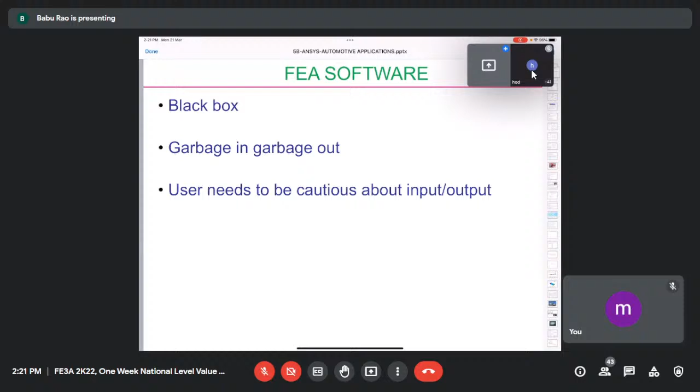Out of all these softwares, though many softwares claim that they have a non-linear solver, in my experience, what I have seen is olden days ADINA and presently ABAQUS. At present, ABAQUS is the software which has a true non-linear solver.

And just for your understanding, I have shown this; many of my predecessors or speakers who are coming in the later stage must be showing these basic analysis stages. You all must be knowing. I need not spend more time here. Pre-processing followed by solution and finally post-processing.

What I would like to say here is you have to be extremely cautious during the pre-processing phase. If you don't establish the modeling practice properly, you will be running into so many errors. So the accuracy of your analysis will be questionable. And depending upon the software, the time required for analysis will also be judged. Similarly, when it comes to solution, different softwares incorporate different algorithms. Like you all know, ANSYS basically uses the Lanczos algorithm.

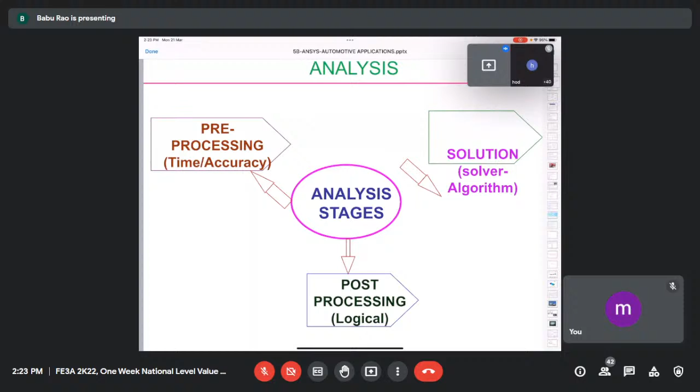So whatever results it is giving out, let it be stress results or displacement results or frequency results or something else, you have to have your own judgment, your own assessment, and you have to carefully examine the results and decide whether the results furnished by the software appear to be logical or not, before you present these results to somebody else.

Particularly when it comes to pre-processing, geometric modeling, meshing, loads, boundary conditions, all will be part of pre-processing. Out of all, most of the time is taken during geometry modeling. Many people make use of 3D elements and 3D geometry straight away. But in my opinion and experience, to the extent possible, you should not go for 3D elements, because meshing with 3D elements is the easiest task. But compared to 2D elements and 1D elements, the 3D element accuracy, because basically, when you are doing FEM analysis, you have to be particular about quantitative and qualitative assessment.

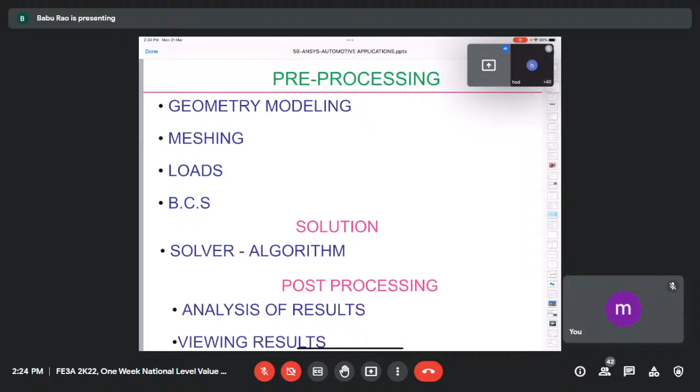Quantitatively, a 3D element may definitely be a suitable thing, but when it comes to qualitative, that is when you are talking about accuracy of the results, what you are predicting, you have to be very careful. And boundary conditions also play a vital role. Boundary conditions are not that easy. And as I told you earlier, you have to be careful about the post-processing part also.

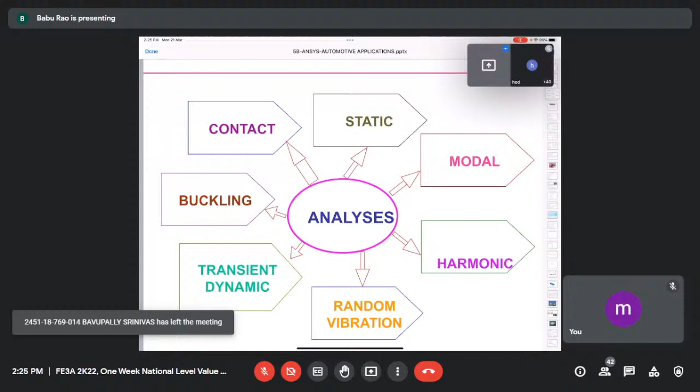Just for the sake of your understanding, many of you must be knowing, ANSYS is basically abbreviated like this: Advanced Numerical System Simulation Software. It's a commercial software package which will enable you to handle various versatile varieties of mechanical problems. So, what are the different analyses that can be done using ANSYS? Starting from static, modal, harmonic, random vibration, transient dynamic, buckling, and contact. And similarly, some advanced level analysis you can also do, like acoustic and design optimization, CFX,

and then fatigue also. Of course, when it comes to the thermal front, you can do steady state thermal analysis, transient thermal, and then thermostructural also. Only one thing you have to note down when you are talking about thermostructural is, you can't give both thermal and structural loads simultaneously at a time.

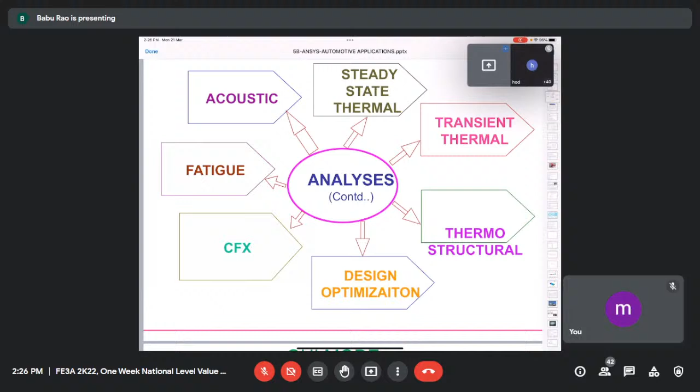First you have to do thermal analysis, and for a given heat load, you will be estimating the temperature distribution. So taking that temperature distribution, which is the outcome of thermal analysis, and then giving certain constraints or boundary conditions, you have to go ahead with the structural analysis, taking the temperature distribution obtained from thermal analysis as the load along with the structural load. Structural analysis will be done.

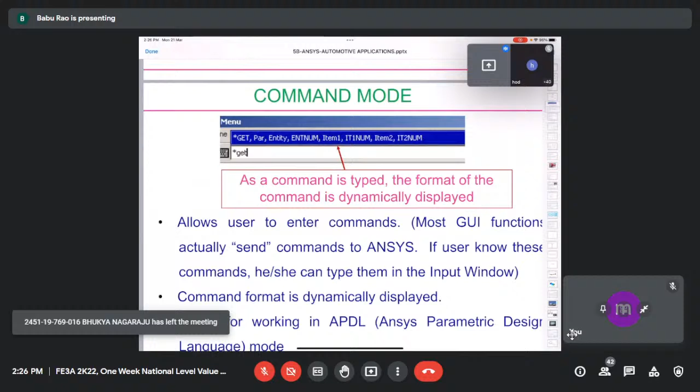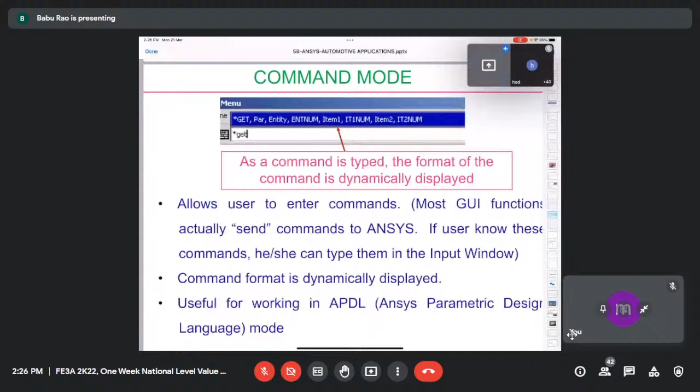If you see the last line of this slide, that is APDL mode, that is ANSYS Parametric Design Language mode. This has got a fantastic feature embedded in it. Many of you may not be knowing. Suppose you are working in an organization where you have to do analysis for the nozzle. Let us say that organization is developing nozzles of different sizes, different dimensions, different materials. Then

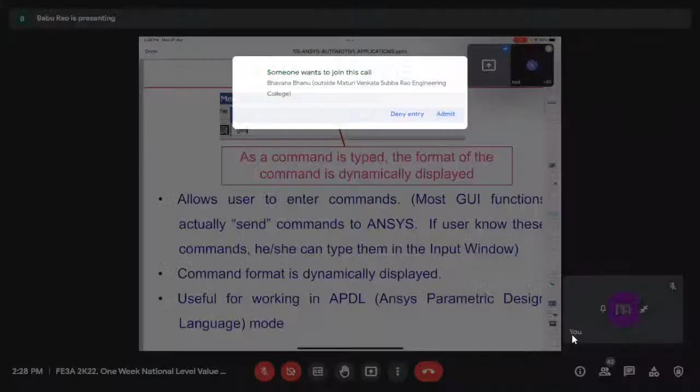every time you are doing analysis, it is not necessary that you have to start from scratch. You need not every time start doing geometric modeling, then meshing, then boundary conditions. All that is not required. Once you do analysis one time, and if you feel that your requirement is repetitive in nature, the moment you complete the analysis for the first time, you will come back with a file with .log as extension. That file you can take, and next time whenever you have to do the analysis for the nozzle with different dimensions, or maybe a different material, you don't have to start again from scratch.

You simply take the log file, you edit it as per your new dimensions or new material properties. Then you just run that log file. You just import that log file into your ANSYS window. You open the ANSYS window. Don't try to do it from scratch. Just get that edited log file loaded into this. Then within no time, analysis will be done for the new configuration. That is one advantage of this APDL mode.

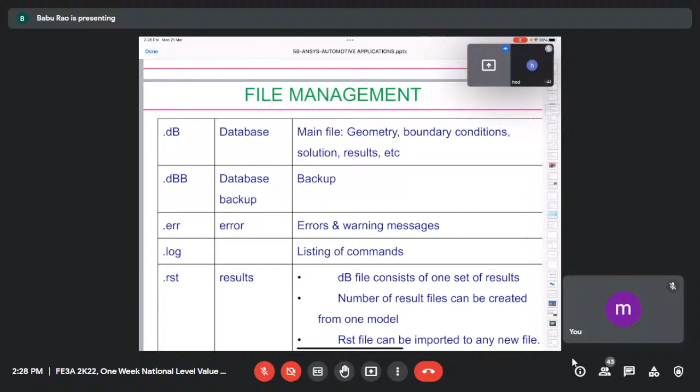And there are some standard file formats also. This DB file, DBB, all that I think you must be knowing. And basically, you must be wondering, the title of the program starts with innovative. But why is this fellow, being a scientist, showing all old or very conventional things?

What I heard from my friends or students who did so many projects with me, where they worked in ANSYS, and when they go for outside interviews, the questions asked to them, what I could make out is, suppose whenever you are planning to join some software company like Infosys or Tech Mahindra, where they induct people based on a mechanical analysis background.

They expect that you are expert in that software. Before you claim that you have done ample analysis in ANSYS, you should be thorough with the fundamentals.

What I normally find is people claim that they have done so many analyses in ANSYS, but many of them are not thorough in fundamentals. They get flustered when asked to explain fundamental things like the difference between a geometric model and a mesh model.

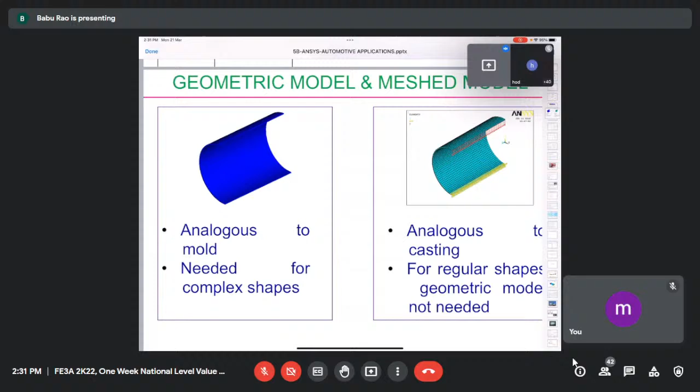It is not necessary that software puts a condition that you have to do a geometric model before converting to a mesh model. Software doesn't care for it; it only looks for the mesh model. We are the ones who make the geometric model so that we get the actual shape of the object for which we have to do the analysis properly. We do the geometric model, then discretize or do the meshing. Otherwise, software needs only information about the meshed model.

Because you should not miss certain fundamentals, another surprising aspect of ANSYS is that it doesn't consider units for material properties. It will not ask you to code the unit; it only asks in terms of numbers. When you are feeding Young's modulus, it doesn't ask you to specify the unit also. Whatever number you give, it takes it.

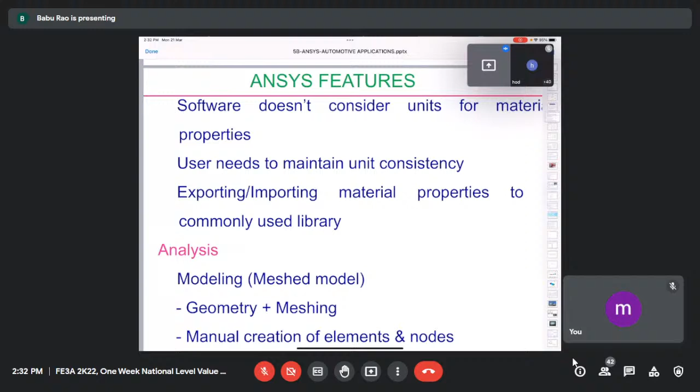So ANSYS expects that the user will maintain consistency. When you start with geometric modeling and give numbers in certain units, when you go for material property in ANSYS you don't have the option to change back to another type of unit. From the beginning, you have to decide whether you will continue with millimeter units or meter units, and maintain that consistency accordingly.

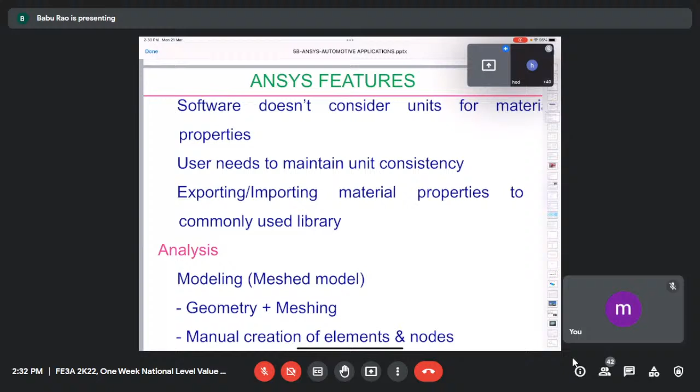However, exporting and importing features are admissible in ANSYS. Whenever you are working with common metallic materials, particularly steel and aluminum, you need not define the material properties every time. You can import and export, and it will be stored in the material property library. Whenever you do a new analysis, you can simply import it.

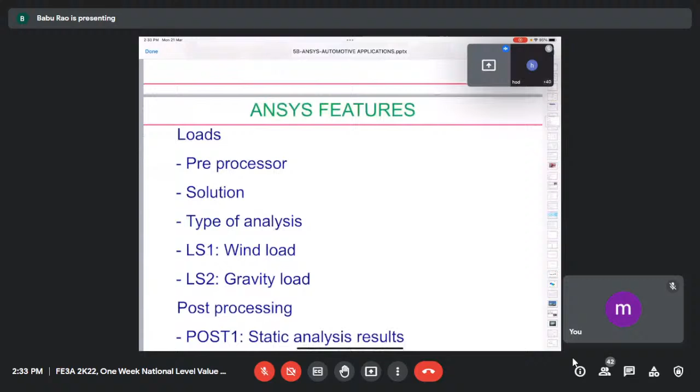When it comes to analysis, it calls for modeling, that is geometric modeling and meshed model. Sometimes when the geometry is not so complex, you can also manually create the elements and nodes. And when it comes to loads, either you can define loads in the preprocessor or through the solution also.

When you talk about type of analysis, certain nomenclature will be there in ANSYS, like LS1, LS2. LS is load step. LS1, when you choose this option, you can give a wind load type of thing. LS2 is load step 2, where you will be giving the gravity load.

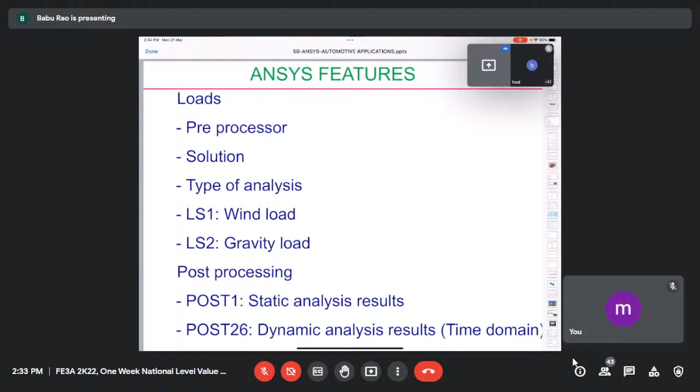When it comes to post processing, you can see time independent results, that is static analysis results, in Post 1. Post 1 is a standard nomenclature followed by ANSYS. Post 26 is time dependent analysis visualization, so whenever you have to watch results in terms of dynamic behavior, you go into Post 26.

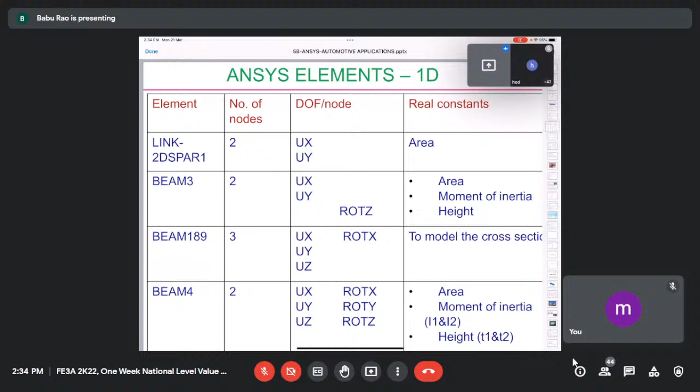I have brought typical elements available in ANSYS. Some of the elements you are seeing here may not be visible in today's version, but I want to give you a feeling of what sort of elements are available in ANSYS, and what degrees of freedom and real constants those elements will be having. Today, Shell 63 element is totally removed from ANSYS, and for 3D elements, I think Solid 45 is not there now.

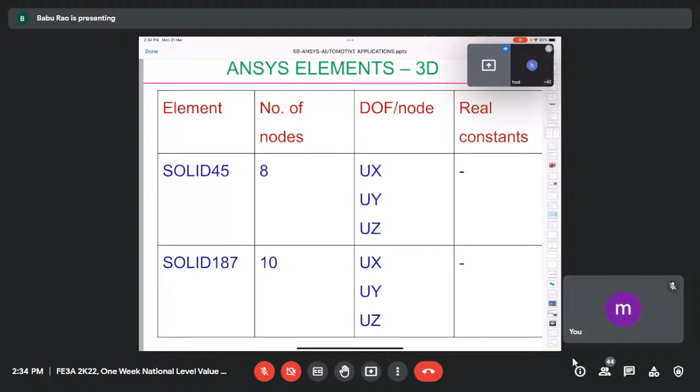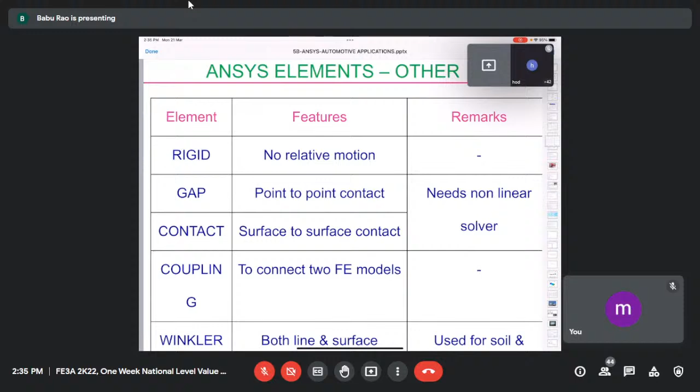Similarly, some special elements also will be there. When you have to handle pipe type of objects, straight away the pipe element is there, and this element is very popular. Combin is a combination element, where you can model both stiffness and damping. This element will be useful when you are dealing with dynamic analysis. And very special elements are also there in ANSYS, such as rigid element, gap element, contact element, coupling element, and Winkler element. Winkler element is normally used for civil applications, where you are required to model the soil and such.

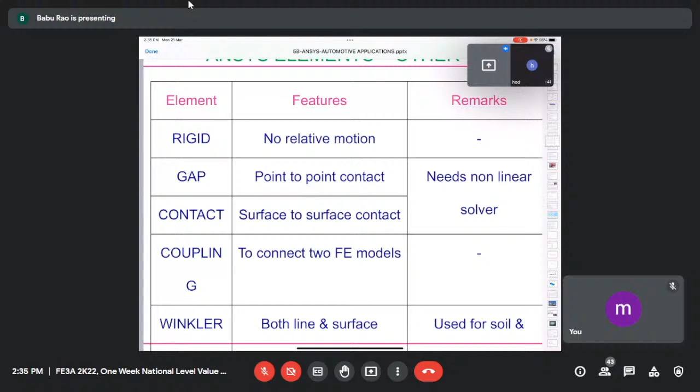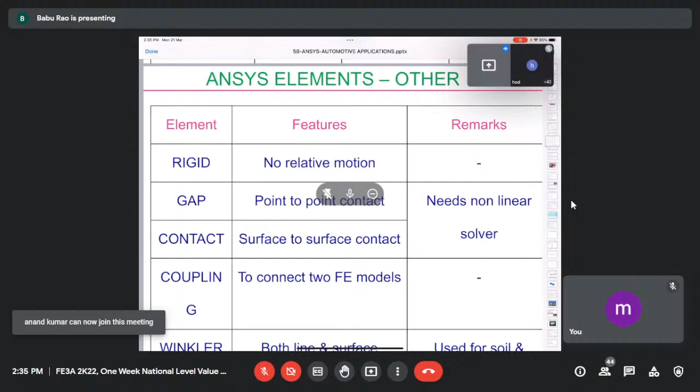Now let's look at the gap and contact element. When you have to do contact analysis, one point we should note is that conventional elements like beam, shell, solid and so on require a linear solver. But when it comes to gap or contact elements, you can model the contact dynamics, but you will be depending upon a nonlinear solver. You also have to bother about the efficiency of the nonlinear solver, that is, the algorithm that has been adopted by ANSYS.

This slide is very important, particularly for students who are expected to appear in interviews. When it comes to material properties, for static analysis, only two material constants are required: Young's modulus and Poisson's ratio. Density will not really be required. But when you go to dynamic analysis, be it modal analysis, random vibration, or transient dynamic analysis, apart from Young's modulus and Poisson's ratio, you are also required to give the density.

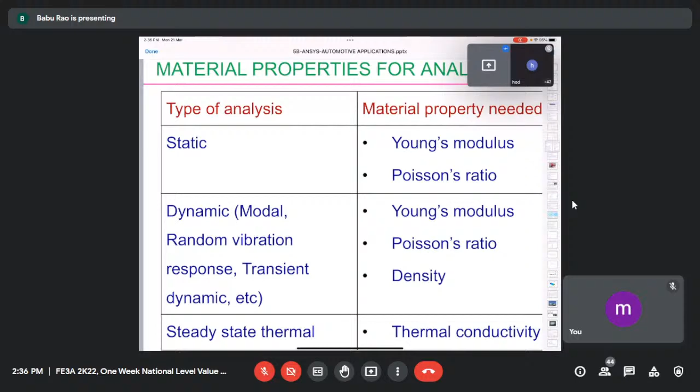When it comes to thermal analysis, for simple steady state thermal analysis, the only property you need to define is thermal conductivity, K. But for transient thermal, that is time-dependent thermal behavior, apart from K you also have to give density and specific heat, CP and rho. So K, rho, CP. When it comes to thermo-structural analysis, apart from K, you also have to give alpha, the coefficient of thermal expansion, along with Young's modulus and Poisson's ratio.

Now I am slowly touching the very foundation part of ANSYS. Many people get misinterpreted about where to start. I have seen students complaining that in colleges, people don't teach ANSYS properly, that they simply deal with non-practical structures like beams and so on. They say our ANSYS lab has taught us only beams, and didn't teach us how to model the automobile engine and such.

But still, I feel one need not blame this, because when you are starting to work on something new, you should also gain confidence. As I told you, the point you should not erase from your mind is that FEM, the finite element method, is an approximate method. So what you are doing is like a guess. There is no guarantee for the accuracy of the result you are predicting.

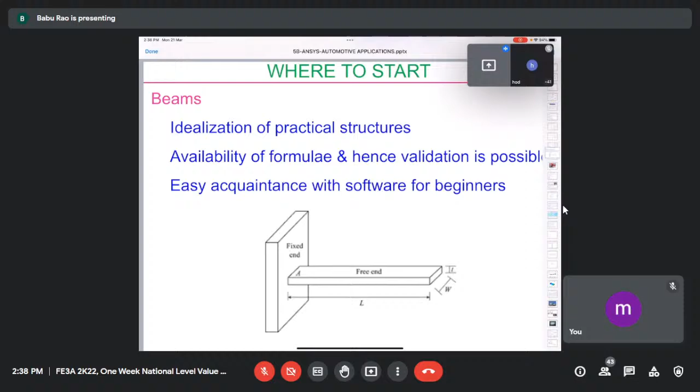Particularly when you are in the beginning stage, if you start working with beams, there are theoretical solutions available. So whatever you do in ANSYS, when you work back from theory and compare the results of ANSYS with theory, you will gain confidence, knowing you are traveling in the right direction. In the beginning, if you aim for analysis of an automobile engine or gearbox, you will be left nowhere, not knowing whether the result you predict is correct or not.

And there are some special features in ANSYS when it comes to analysis. Particularly when it comes to static analysis, sometimes you may have to deal with rotating objects also. I think you all must be knowing, when you are talking about static analysis, only one matrix will be there, that is the stiffness matrix K, and two vectors will be there.

One is the load vector, that is F, and another one is the displacement vector Q. So the general relation used for static analysis is K into Q equal to F.

Whatever load you give, say when you have to do static analysis for a rotating object, let's take the example of a ceiling fan blade. The primary load that comes on the ceiling fan blade is its angular velocity. So when you define angular velocity as a load, the software takes whatever omega you give and calculates mr omega square, converting it into centrifugal force. That much value gets dumped into your force vector.

So when you do the static analysis for the ceiling fan blade, you will see the stress contours on the blade, but the blade will not be visible as if it is physically rotating.

But to the best of my knowledge, that feature is there only in ABAQUS. In ABAQUS, when you see the stress contours, what I mean is, when the object is rotating, at 0 degree what will be the stress value, at 90 degree what will happen, at 180 degree what will happen - all that you have to do manually in other software. But in ABAQUS, you can even see the stress contours when the blade is physically rotating in that view. That feature is there in ABAQUS, but not in conventional FEM software like ANSYS and so on.

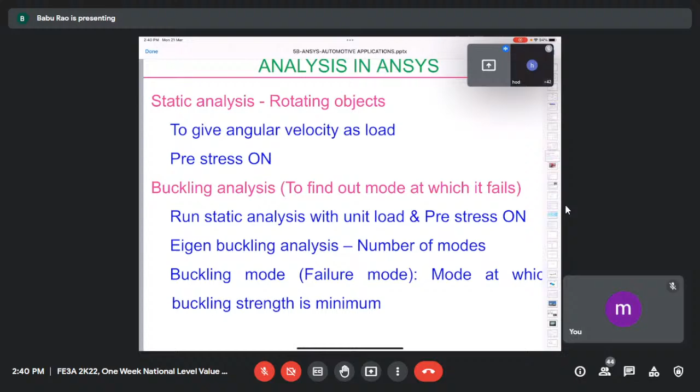And you can also do buckling analysis. Buckling analysis is some sort of dynamic analysis only, though we call it static. It is called eigenvalue buckling analysis. So you will be able to understand the failure mode.

And for thermal analysis, one important point to keep in mind, which may be useful for you in interviews, is that when you are talking about the edges of the object for which you are doing thermal analysis, ANSYS will treat all edges as adiabatic until unless you specify otherwise. So keep this point in mind.

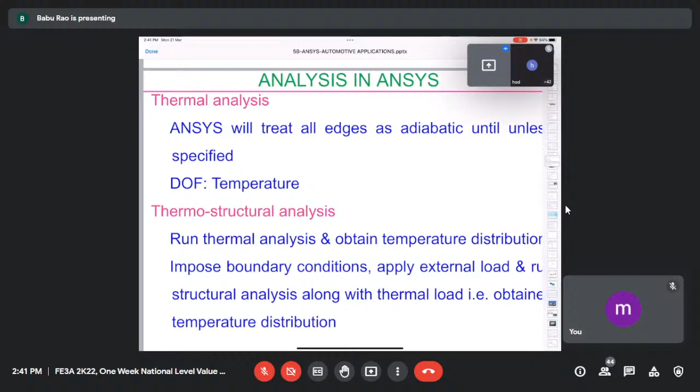And when it comes to thermostructural analysis, first you have to do thermal analysis, obtain the temperature distribution, then consider the boundary conditions or constraints, apply the external structural load, then do the structural analysis along with the thermal load. That is how you do thermostructural analysis.

So after giving the fundamentals of ANSYS, I will now make you run through one case study, because as I told you in the beginning, I have to limit myself to the automotive perspective. So I have actually guided one MTech student in doing the analysis of a particular chassis.

You all must be knowing, I need not teach you, all of you are automobile engineers. In any automobile vehicle, when it comes to structural perspective, when we are talking about load-bearing members, chassis is the main load-bearing member, which takes care of almost all the loads of all subsystems.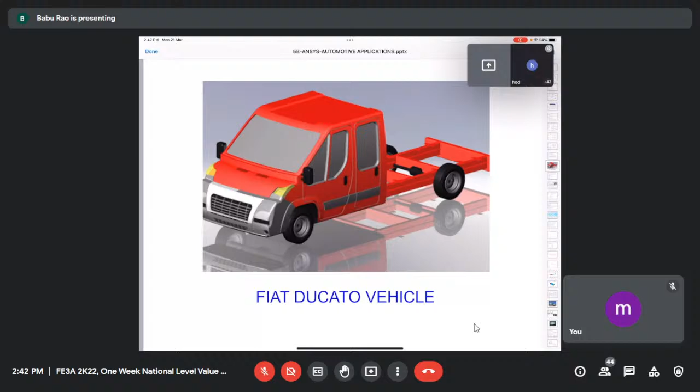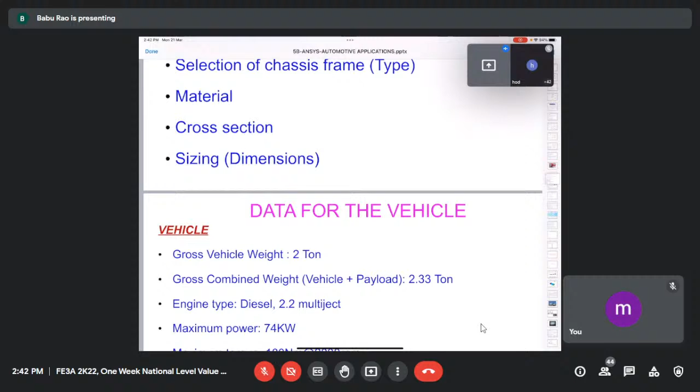So we have taken this vehicle, and initially we started with static design. This is the design philosophy we adopted. The design goal is the strength to weight ratio should be as high as possible, and these are all the things we have to basically estimate: selection of the chassis frame, then we have to choose the material, choose the cross section, and work out the dimensions. These are the inputs we have taken for this vehicle to do the analysis.

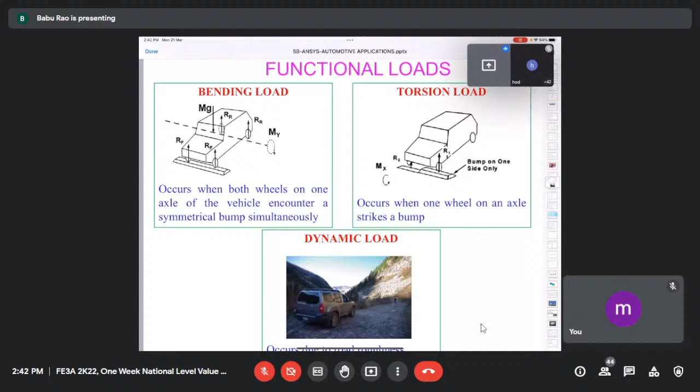Then these are the various functional loads that come onto any automobile chassis - bending load, torsion load, and dynamic load. Dealing with bending load is relatively easy compared to torsional load. Estimation of bending stiffness is very easy compared to torsional load, because many people think chassis is like a beam type member, so if we can estimate the bending load, nothing like that - but we also have to estimate the torsional stiffness. That is also an important part when dealing with this chassis.

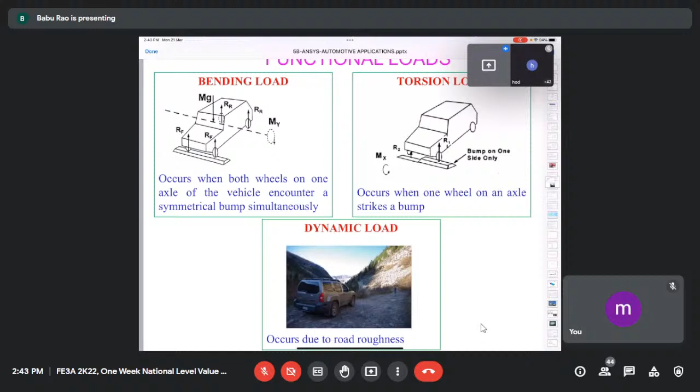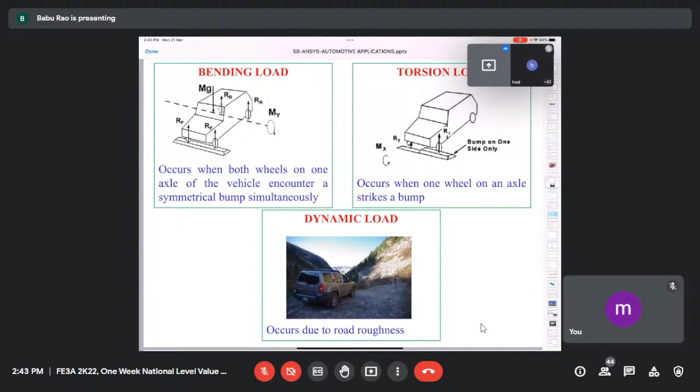Now, in most of the cases we limit ourselves by doing static analysis, but it will not be sufficient. See, when you are talking about an automotive vehicle, you also have to ascertain its design adequacy in a dynamic environment, that is particularly vibration. So in this particular case study, what I am showing is more interesting.

See, you would definitely have seen many reports, many papers which have dealt with static analysis of the chassis. But apart from that, through this case study, you will also understand the importance of random vibration response analysis. So basically, I think this nomenclature you all must be knowing.

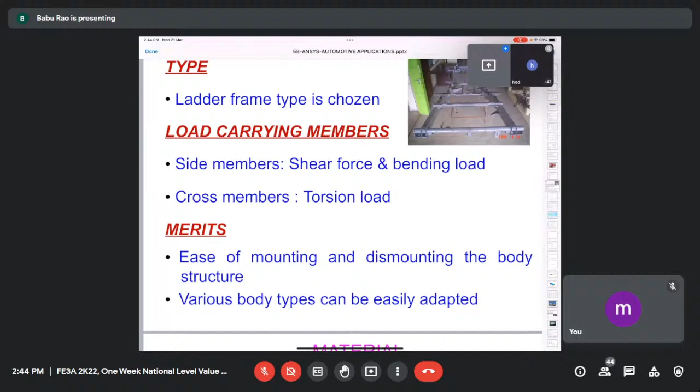We have chosen a ladder frame type, and when it comes to load carrying members, basically the side members are expected to carry the shear force and bending load, but the cross members carry the torsion load also. So having selected the ladder frame, there are certain associated advantages. One is mounting and dismounting of the body will be easy, and various body types also

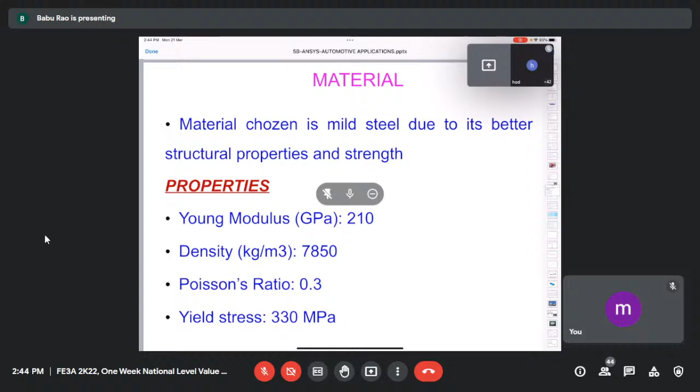can be accommodated. When it comes to the material, we have chosen a common structural metallic material due to its very good structural properties and strength. These are the metal properties, I need not tell you. Now comes an interesting part.

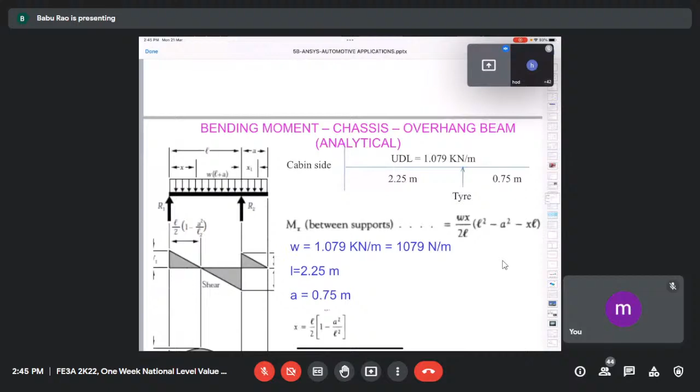When it comes to cross section, you all know very well that there are different standard cross sections available. But in my opinion, compared to any other cross section, I cross section is the best one. For some reason, if I cross section is not possible, then you should go for box cross section. Box cross section means a combination of two C cross sections. Worst case is C cross section. So these three are the best cross sections available based on the hierarchy.

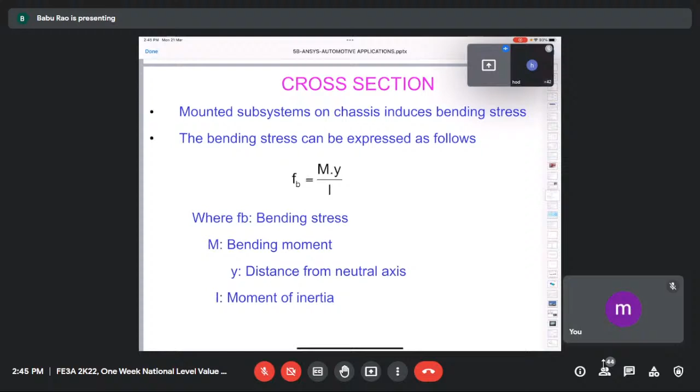So to work out the cross section, we have taken the standard bending equation. Of course, this is readily available. It is not something that we have derived. We have taken the expression for bending stress, which basically wants us to estimate the bending moment. So we have assumed that the chassis is something like an overhanging beam, and then we have taken the associated formulation from theory, and we have estimated the bending moment.

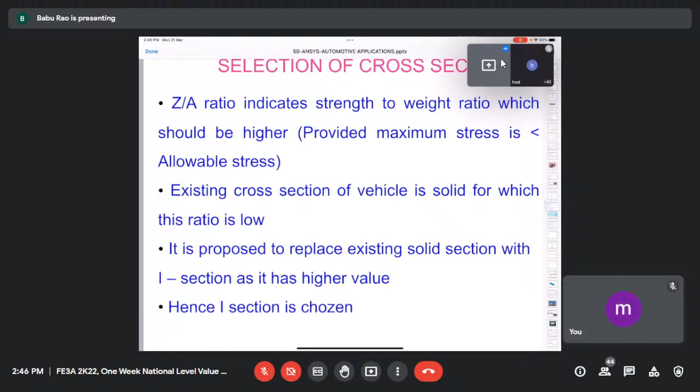And the existing cross section of the vehicle which we have considered is solid, for which this ratio is very less. So as I told you, it is basically proposed to replace the existing solid section with I section, as it has got a very high value. That is how we have chosen the I cross section. I also want to bring it to you.

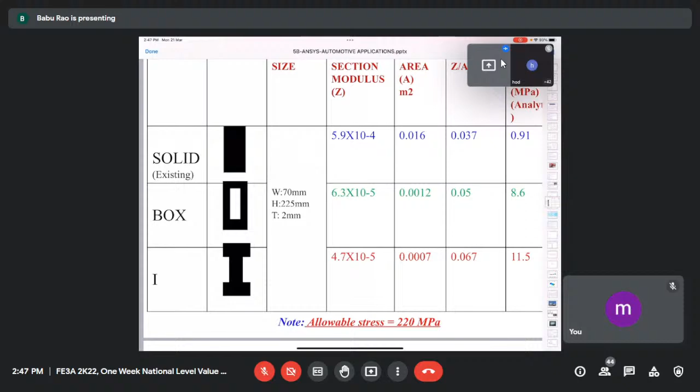As I told you, any automobile vehicle, when it is moving on the road, has to face vibration invariably, and the nature of the vibration will be random vibration. That is why, you all know very well, we have shock absorbers. When you go on a two-wheeler, or when you are sitting in a four-wheeler, when the vehicle is moving on the road, you experience some vibrations. Where are these vibrations coming from? They are basically coming from the road roughness and the speed of the vehicle also.

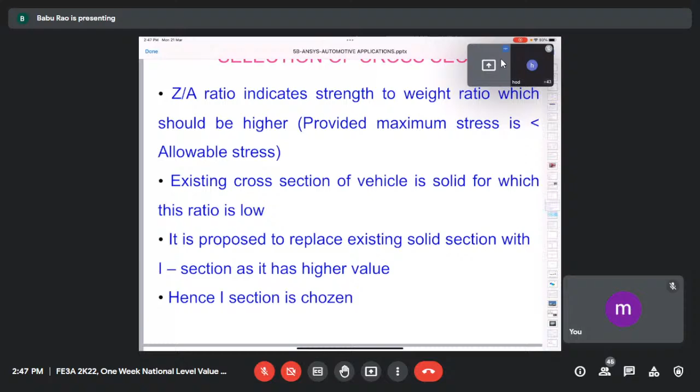So out of all cross sections, I cross section is the best section. Not only for the strength to weight ratio, it will have the highest vibration resistance in terms of damping. That is why I cross section is the best cross section. So once the cross section is finalized, length and breadth are maintained as the existing, that is standard data available in the literature.

Only the cross section has been changed from the existing rectangular cross section to I cross section, and then we have worked out the base model. And whatever additional members are required, maybe for enhancing the torsion stiffness, we tried to add based on the iterative study which we have carried out with the help of the FE model.

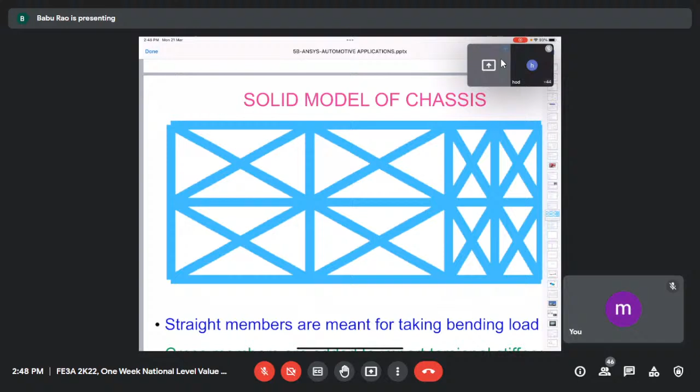Otherwise, the solid model of the chassis, when you see it from the top view, looks like this. The straight members, as I told you, are basically meant for taking bending loads, whereas cross members are added basically to increase the torsion stiffness. This is how the solid model of the chassis looks.

Then we have gone ahead to the dynamic design. As I told you, any vehicle in general experiences very high random vibration. And this random vibration, when the vehicle is moving on the road, gets transmitted from the road through the tires to the axle and then to the main chassis part. And in between, the suspension system will be there.

You know very well we have shock absorbers and all. In case of a two-wheeler, we call it a shock absorber. When it comes to a four-wheeler, we call it a suspension system. This suspension system is expected to reduce the vibration coming from the road. So sometimes the suspension also will not be sufficient. Then we may have to change the suspension system so as to keep the vibration in limits. But suspension system replacement is not always possible.

I'm just giving an example, not to criticize anybody. We have this passenger type of RTC bus. When you travel in the passenger type of RTC bus, and when you travel in something like a Volvo type of vehicle, you normally find a difference in comfort because of the suspension system. Volvo will have an advanced suspension system, that is a pneumatic type of suspension system.

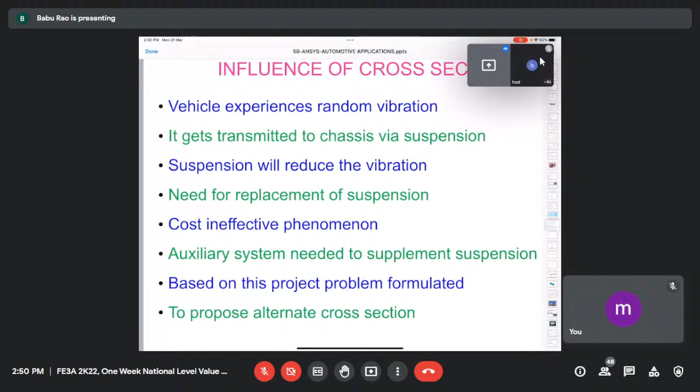So though the primary objective of having a suspension system is to reduce the vibration, you can't fully depend upon the suspension system. So apart from dependence on the suspension system, you can also plan the proper cross section for the chassis in such a way that it also adds a good amount of vibration resistance or vibration reduction.

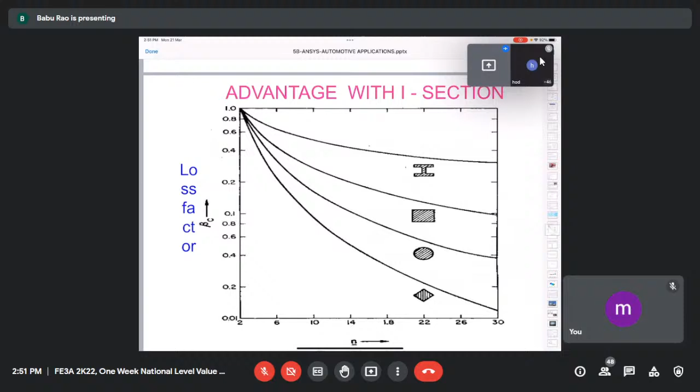As I told you earlier, this plot shown here has been captured from one book, Principles of Vibration Control, written by Mr. Mallik, a professor from IIT Kanpur. He has done a study. He says out of all cross sections, standard, diamond, circular, or rectangular, the I cross section will have the highest loss factor. Loss factor is nothing but damping. Damping is nothing but resistance to vibration.

So now the point is, when we are talking about dynamic analysis, I feel very few of you must have dealt with dynamic analysis in ANSYS. The software will give you the methodology for how to do the dynamic analysis. Dynamic analysis basically means 3 different types of analysis: one is modal analysis, another one is random vibration response analysis, and the third one is transient dynamic analysis. I will explain when random vibration is required and when transient dynamic is required.

When the vehicle is going on a normal road, whether a smooth road or a normal rough road, what you experience is sustained vibration. As long as the vehicle is going on the road, it will experience vibration. That is sustained vibration, called random vibration. But when the vehicle has to pass over speed breakers or potholes, the special dynamic environment experienced by the vehicle is called shock. Instead of calling it shock analysis, in software nomenclature you call it transient dynamic analysis.

So when you have to assess the design adequacy of the structure, depending upon the requirement, sometimes you do random vibration analysis, sometimes you do shock analysis also. But whether you have to do random vibration analysis or transient dynamic analysis, carrying out modal analysis is a prerequisite. Unless you do the modal analysis, you will not be able to do the random vibration response analysis.

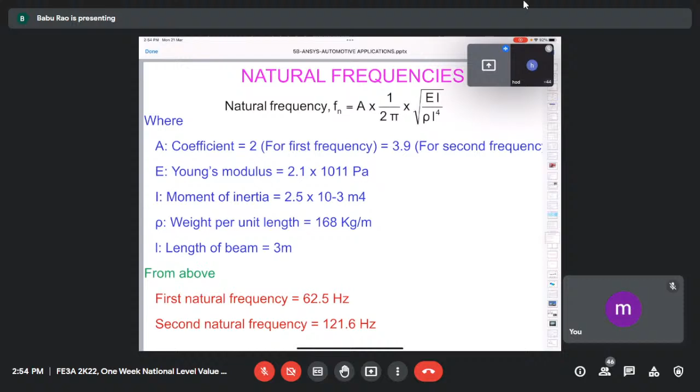To start with, this is how we have taken the formula for natural frequency. For various standard beam configurations, we have the closed form solution for natural frequency. In this, certain coefficients are required, which we have taken from the literature, and it also calls for some material properties like Young's modulus, density, some dimensions like length, and it also needs moment of inertia. When we keyed in all the input parameters in this relation, we could estimate that the first natural frequency is 62.5 Hz and the second natural frequency is 121.6 Hz.

Now when it comes to damping, once you complete the modal analysis and estimate the frequencies, you also need the damping value. So from the book I was mentioning earlier, Principles of Vibration Control, for the chosen cross section, we have captured the formula for estimating the loss factor. Using different parameters like the damping index of the beam material, that is steel, and the ratio between thickness to half of the height, we have calculated the loss factor. The damping factor is half of the loss factor. That is how we have estimated the damping factor.

Then this is the most challenging part. We have to do the random vibration response analysis without using the software. As we have seen, the chassis has only two frequencies within the frequency range of interest, that is up to 150 Hz. This is also an interesting thing which you are supposed to know: what is the frequency range of interest? I just want to give a brief about the vibration aspect also. Of course, you would have studied it during your curriculum.

When it comes to vibration, shock is different. The two standard forms of vibration are, one, sine. When we study vibration, we call it harmonic motion, harmonic analysis. That is basically sine. The second one is random vibration. The difference is that sine will be regular in nature. It is harmonic, it has some discipline. But random vibration is not regular. It has an irregular, erratic type of behavior.

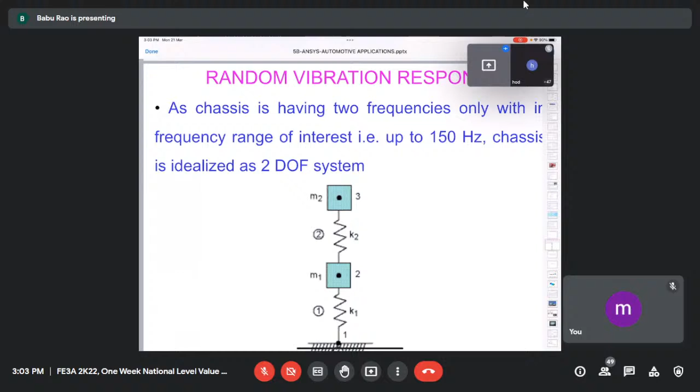See, when it comes to a 1 degree of freedom system, when there is only one frequency within the frequency range of excitation, doing random vibration response analysis using the theoretical method is as easy as drinking water. But beyond a 1 degree of freedom system, beyond one frequency, when you have two frequencies or more, then treating it theoretically is very, very tough.

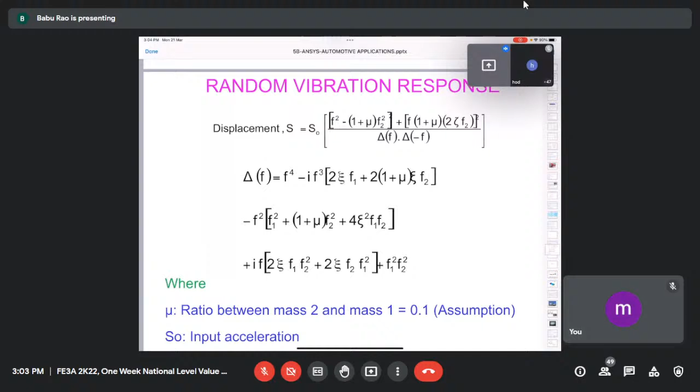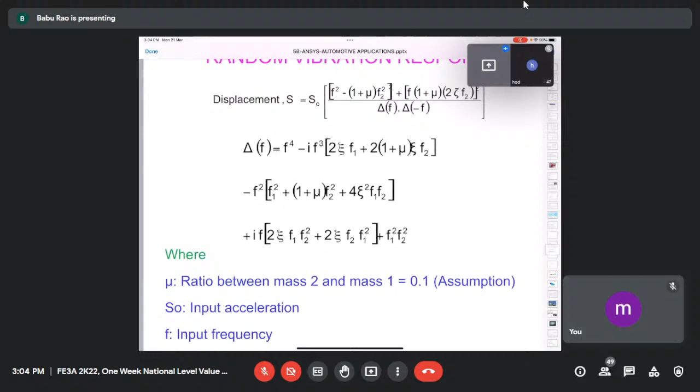So this is how the formulas are. We could get them from some standard and very rarely available literature, and we had to do some mathematical derivation also. This is how we got the expression for response in terms of displacement. And then, whatever formulation we could establish for estimating the random vibration response, for the sake of best utility, we have developed a software using MATLAB.

You all must be knowing MATLAB. MATLAB is a programming language. We can write programs, but MATLAB has got so many features. MATLAB has got GUI-based features, graphical user interface. The best example is the digital calculator in your computer. When you want to use it, only certain buttons will be visible to you. Numbers, multiplication, addition, sine, cos, all the symbols will be there. You just click a specific button and your result will be produced.

But whether you know it or not, for you to get a certain mathematical operation done, the back-end program is written in Visual Basic. The computer in which the digital calculator is there need not have Visual Basic software loaded. Without it, the digital calculator still works. Because once we develop a particular software, if we convert it into an exe type of file, then you can use that file in any PC where that particular software is not there.

What I mean to say, the program we have developed in MATLAB, once we convert it into an exe file, can be loaded in any computer where you don't have MATLAB software. And the additional advantage with the GUI-based feature is you don't have to get into the mathematical formulation. You don't have to get into complexity at all. The GUI will provide certain buttons where you can simply enter the inputs.

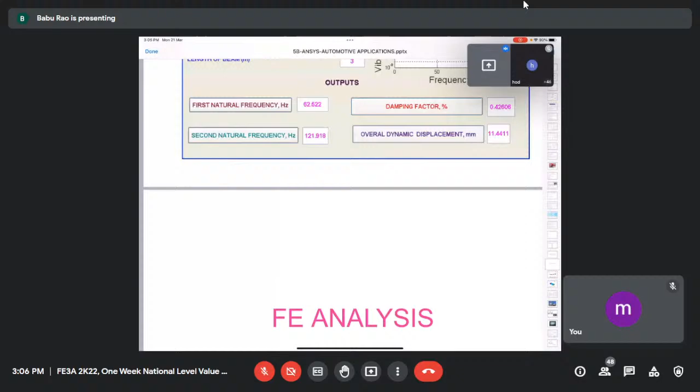Then, to validate whatever results we estimated using the theoretical method, we did the same analysis using ANSYS software.

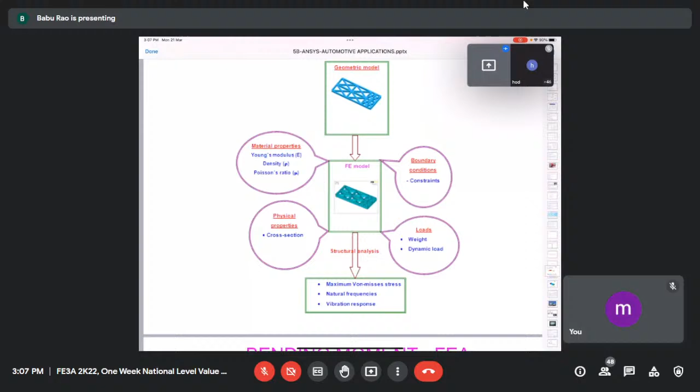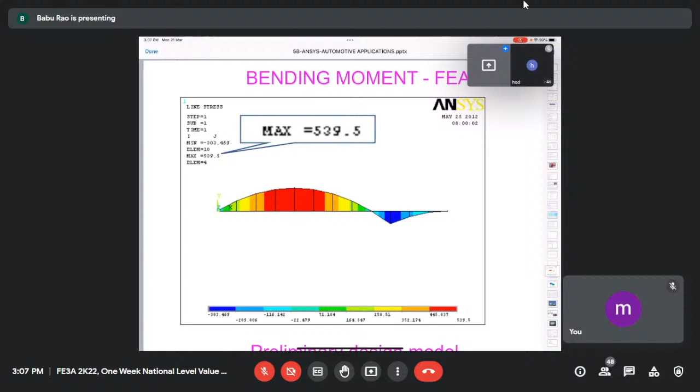As part of static analysis, we estimated the stress; as part of modal analysis, we estimated natural frequencies; and as part of dynamic analysis, we estimated the vibration response. This is how we did the static analysis. We estimated the bending moment and the bending stress. And this is the FE model with the beam element.

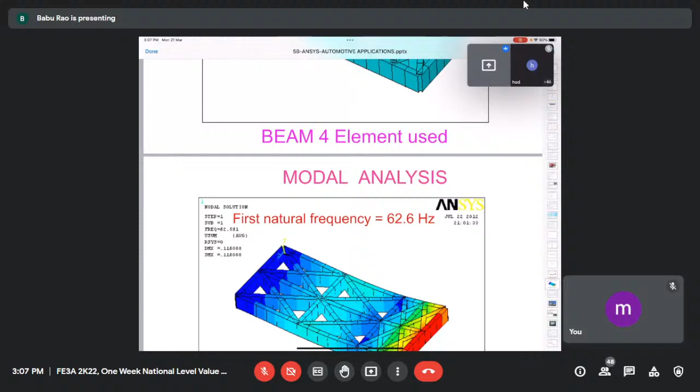The first natural frequency has been estimated by carrying out modal analysis in ANSYS. The second natural frequency is also obtained; that is the second mode shape. And finally we did the random vibration response analysis.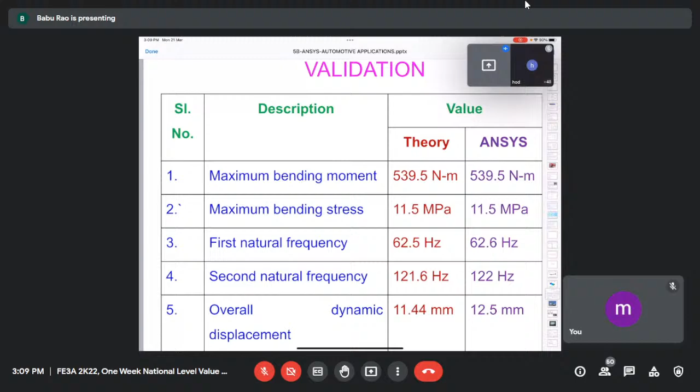What I mean to say, for you to gain confidence about the subject or about the theme which you have taken, in fact, we have struggled a lot. Initially, we thought we would do it with ease, but establishing the formulation for doing random vibration response analysis without depending upon the software was not an easy task at all. We struggled a lot. And finally, the formulation we established for carrying out random vibration response analysis appeared to be correct when we tried to validate with ANSYS.

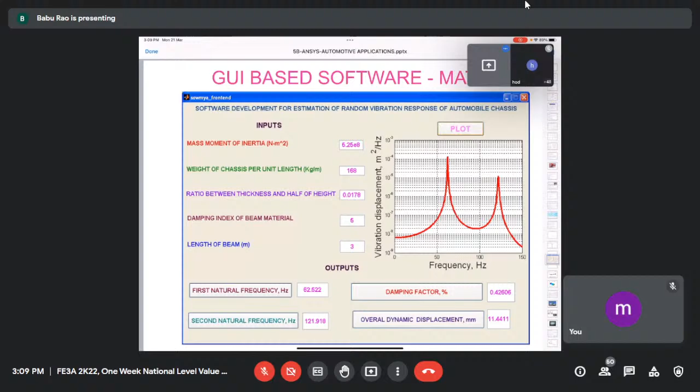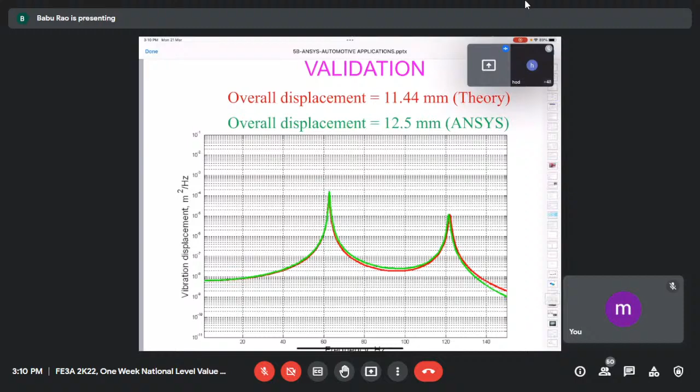See, what I want to say with the utmost confidence, whatever the features that are available in commercial software like ANSYS, we could establish using a typical programming language like MATLAB. All these outputs, whether it is natural frequency or damping factor or dynamic displacement or bending moment, bending stress, we have developed a parallel platform using which analysis can also be done. So that was our expected outcome. And you can also see, not only in terms of numbers, the displacement pattern, how it is matching between theoretical calculation and ANSYS.

Though the topic given to me is to speak about ANSYS and analysis from an automotive perspective, I think I am exceeding the limits stated to me, for the benefit of faculty members or students. As I told you in the beginning, doing analysis is not a great job. I want to tell you with utmost confidence, with utmost guts, doing analysis is as simple as that. There are so many people in the lanes of Hyderabad who can teach you how to do the analysis. It's not a big job at all.

But as an automobile engineer, my strong recommendation is you should work on experimental things also. You should know how to measure the vibration for an automobile vehicle. We have been working for the last 22 years on how to measure vibration. Why I say this is, in today's scenario, what is the expectation of an automobile engineer coming out of the engineering college? He should get a good job. Except a few people who want to go abroad for an MS, many of you must have a desire to get a core job, that is the automotive sector. So just knowing how to do analysis will not be sufficient.

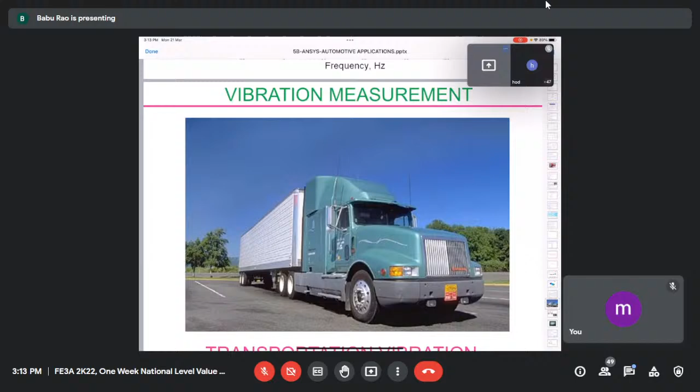Strain measurement to some extent, you don't have to put your brain to a great direction, but vibration measurement will be most crucial. So this I want to show you. As I told you, the need for the measurement I have already explained. The first and foremost point is the structural integrity.

When the vehicle is transported from Hyderabad to Karimnagar, it should not happen that bolts and nuts get loosened. The way the vehicle has integrity before transportation, before movement is started, the same type of integrity is expected to be exhibited once the transportation exercise is completed. If everything is fine, then you don't have to measure the vibration.

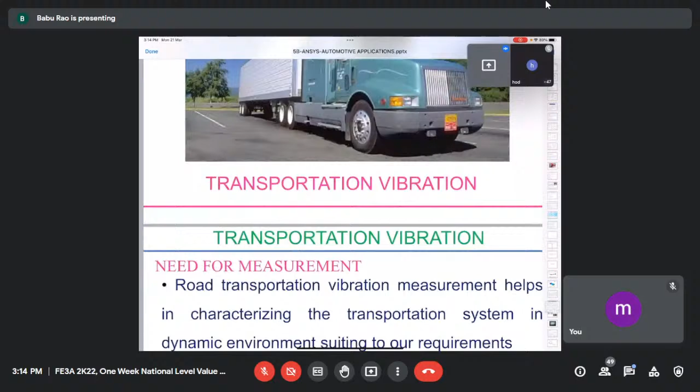Why then is vibration measurement required? When something goes wrong, the measured vibration will tell you where exactly the vibrations are coming high and how to reduce them. Today you manufacture a vehicle like this. Unfortunately, when you make this vehicle move on the road and measure the vibration, let's say vibration levels are very high, 1000 units and all. You cannot say this vehicle is discarded, a useless vehicle, because you already spent effort and money on that.

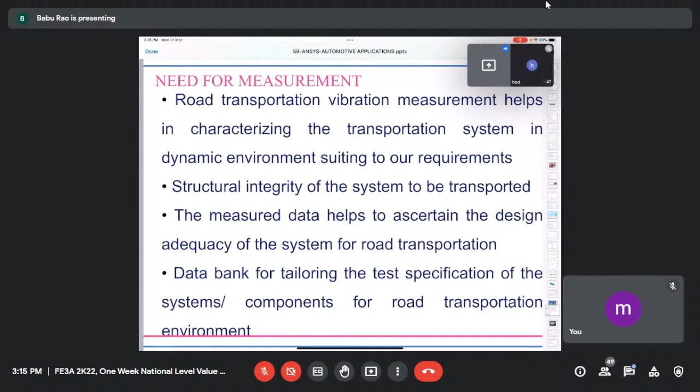So what you have to do is some design modification. For that only you are called an engineer. Engineer's job doesn't end with the design. He has to give solutions to problems. So you have to modify the design, and for you to modify it so that vibration levels will be within limits, the prime input you need is the vibration levels.

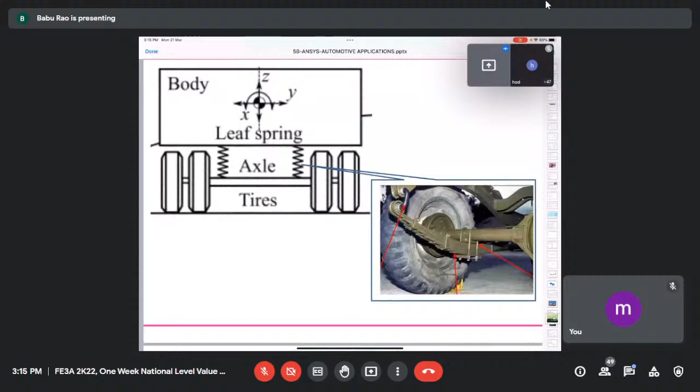That is how the genesis is formed for vibration measurements to be taken. And these vibration levels are to be measured with different conditions, with different road conditions and different vehicle speeds also. As I told you in the beginning, vehicle suspension system, many people have a wrong notion.

As you are seeing in the photograph, I think you all must be able to make out, this is called leaf spring suspension system. Many people feel that this leaf spring system is just to carry the load of the vehicle. Of course, that is also a duty, but the main objective of the suspension system is to provide vibration reduction between the axle and the body.

How the suspension system is behaving, to what extent it is reducing the vibration, you will be able to establish practically only through vibration measurements. What you have to do is measure the vibration before the suspension system, and measure the vibration after the suspension system, through which you will be able to understand the functionality of the suspension system.

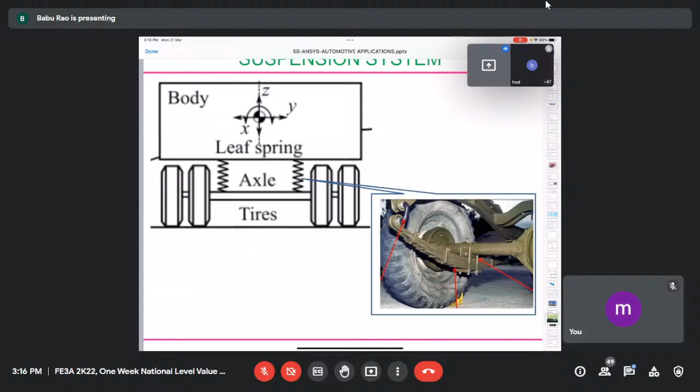In many vehicles, even the normal conventional DCM type of vehicle, if you just put your head down and look, you will see almost all the vehicles have leaf spring suspension system.

Actually, many people don't know - like when it comes to fruits, we always go behind the costly fruits. We feel that if we eat apple or some other fruit, our health will be good. But there is a simple and easily available fruit in the market, that is guava. Guava possesses all the qualities that apple has, and more - some additional qualities which apple doesn't have.

Like that, this leaf spring suspension system is treated in an inferior manner. People always look for pneumatic suspension systems, which are more expensive. But leaf spring suspension system has a unique feature - it's called constant natural frequency suspension system.

What I mean to say is, each vehicle is supposed to carry some load. For some reason, a vehicle is underloaded; sometimes it's overloaded. Even then, the construction of the leaf spring is such that the leaves will come close together, or sometimes go far apart. So the distance between individual leaves in a leaf spring system is variable.

If a higher load is put on the vehicle, the leaves will come close together, and accordingly stiffness will be high. When the load is less, the leaves will go away from each other, and accordingly the stiffness will come down. You know very well that frequency is nothing but the ratio K by M, stiffness and mass. So as per the varying load, stiffness also keeps varying - when the mass is increased, K will increase.

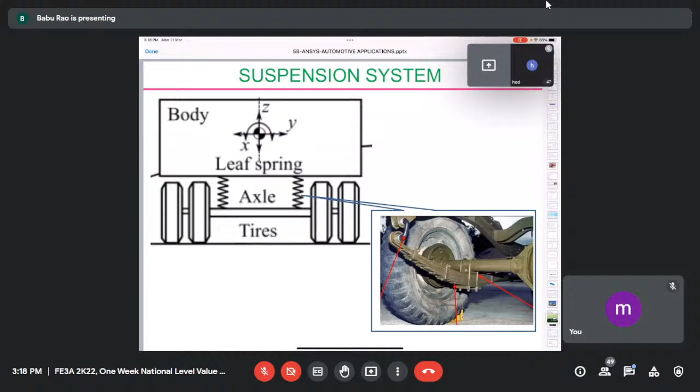When the mass is decreased, K will reduce, so the natural frequency of the suspension system is maintained the same at all times. The natural frequency of the suspension system is supposed to be some value. So when the load on the vehicle changes because mass is changing, if the frequency of the suspension system changes, then its vibration reducing characteristics get affected. So the beauty of the leaf spring suspension system is it always maintains the natural frequency in the order of 3 to 5 Hz, irrespective of the load coming onto the vehicle.

So for you to deal with vibration measurements, you need certain infrastructure. For colleges like MVSR college, if I would have been giving this lecture in any other normal, typical private engineering college, I would not have shown these slides at all. For a college like MVSR, which has got plenty of resources, please don't mind this comment, I sincerely suggest instead of just training students on theoretical things, you must get certain infrastructure into your laboratory. You should upgrade your laboratory. We will be helping you figure out what sort of experimental infrastructure you need.

By the time the automobile engineer is leaving your college, he should not just be fed with theoretical knowledge but also with experimental things, how to do vibration measurements. If he has been trained in this area, you yourselves can throw a challenge to automobile companies: you come to our place, you will find diamonds in our college who are also trained in the experimental part, trained in how to do vibration measurements. It's like plucking a fresh fruit from the tree and just eating it - you can take the student from our campus and lift him into your institute without giving any training, and he will be useful to you. So to claim to that extent, I sincerely suggest colleges like you upgrade your laboratories with these systems.

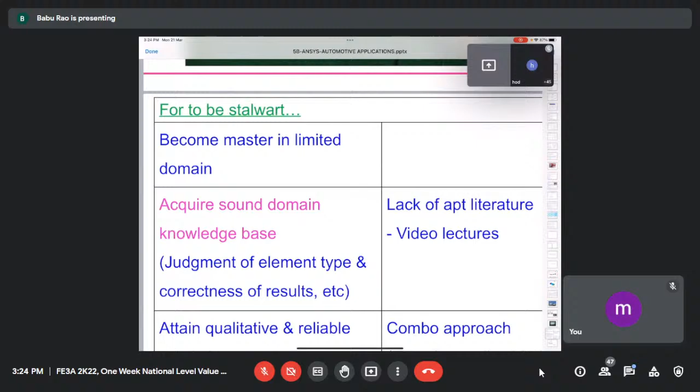So, in fact, serial number 2, I want to tell you, we have modal testing. This modal testing - don't get surprised. What is this modal testing? Whatever modal analysis you are doing, whatever modal frequencies, natural frequencies, whatever mode shapes you are predicting using ANSYS, all that can be done experimentally, for which you need this modal testing hardware.

I want to tell you one example, though I don't have that slide to show you. Tech Mahindra company, you know very well, deals with so many projects where they do analysis of automobile systems. But unfortunately, they don't have experimental modal testing facility available with them. Around 7 years before, Tech Mahindra team approached us. They did the analysis for the steering column assembly for one of their clients. Their client put a condition to Tech Mahindra: whatever theoretical results you have predicted using ANSYS, you please also establish through testing. Because they were not having testing hardware, they approached us.